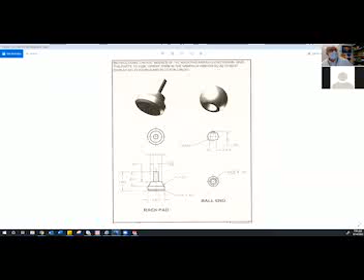All right, so in your table, we did that little table part, okay? This little plunger right here is what stamps down on top of the table. So it's gonna come down and punch through, and this is the part we're gonna make first. And then we're gonna make one of these.

Goes on the end of your handle, so it kind of holds on. Typically, this would be a threaded assembly. We're gonna do it as a welded assembly instead. But we're gonna spend some time on this. I'm gonna show you two ways to make this rack pad.

Okay, so if you're at home working on this, you want to split your screen. I was gonna print, like I said, I really was gonna print this off, and I can't print a thing today. So let's take a minute and look at these numbers and get an idea of what we want to do. Now, this is all circular as we're thinking it through.

It's got a chamfer on the bottom. It's got a fillet going around this space right here. We'll round this to it. And then it's got the stem. And the stem is going to stick into what is called the rack. And the rack is similar to what's on your steering column. It's a rack and pinion system.

So what we're looking at then is, as we build this, how would this be made physically? What ways do you think you can make this? If I was to say, go build this, what would you do? From what you guys have done in your lives so far.

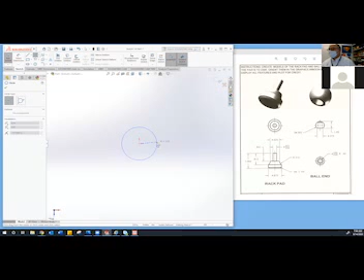Did you get rebooted yet? I'm working on it. Okay, good to know.

And this is our larger circle. So we look at our drawing, and where is our diameter for this largest circle? What would that be? I can't read numbers that far away. I'm okay, guessing 0.875. 0.875 is correct.

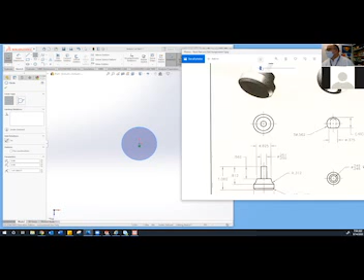Oh, I guessed it, you guessed it well. Okay, so we're going to do a smart dimension then. This will be weird, and make it 0.875.

Now at that point, we're ready to do our first extrusion. I've got to move this over a little bit.

And it's going to extrude up how far? How high up does that 0.875 go? Is that the value? So what you got to do is we're going up to this level right here, do you see that? So that level right there. It's supposed to have a little flange.

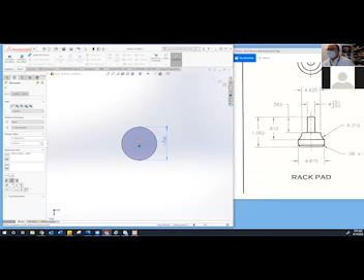1.062 minus 0.812, yeah, subtraction. So what I'm going to do is just go into the sketch here, go into features, and then go right into my extrude boss base. I know my total height is 1.062, I'm going to subtract from that 0.812. But I'm not going to do that math myself, I'm just going to type it in: 1.062, then put the minus sign, 0.812. There's no point in me doing more work than I have to if the computer will do it.

Then I hit enter, and it comes out - oh, it's a quarter of an inch. How nice, pretty simple math, right? But let SolidWorks do the math for you.

Yes sir. Oh, never mind, it says restarting because my thing crashed. Yeah, we're gonna have a little bit of that today, I think.

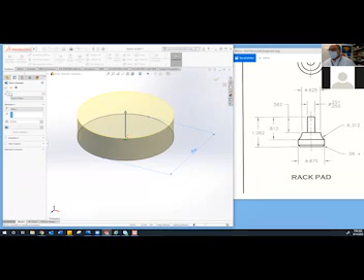Unfortunately, okay, so that gives my height. Just go ahead and check that off once you get it. So we're gonna take that value, 0.875, and extrude at 0.25.

How are we doing, buddy? We're getting close. Do you reboot the whole computer? Well, like I said, we're gonna do this twice.

This is probably not the easiest way of doing this, but it does allow me to show you a couple of things you can do. Questions - because now you can actually ask questions, and I can read faces a little bit, at least eyes. Yes sir, what's up man?

Okay, so what you're going to do is you type in the value 1.062, minus, and then you put in the 0.812, and then enter. Bingo, just like that. Isn't that sweet? Then check it off.

Look at this, I'm able to see your screens without going through a whole nightmare thing.

Okay, where are we at? We got this all extruded. Okay, so features, extrude boss base. And right here, the distance is where we type in those values. So type in 1.062 minus 0.812.

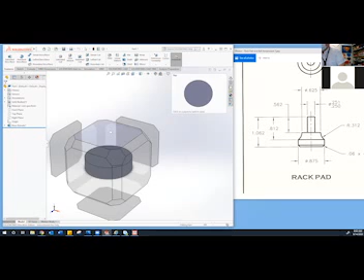Okay, this is the top view. We're going to make another circle on the top view. Typically I'd go into 3D and draw this, but we'll be okay right here, I think. Now, what's the next size circle that's on this?

You see how that comes? Yep, the 5/8. See how that comes down? And there's our next circle.

Okay, we good? All right, let's do a circle then. New sketch - this will be the first time we've done multiple sketches on a part. So do a new sketch and then activate your sketch.

Give the yellow box - it says take a minute and think about it. So if someone gives you a yellow snow cone, don't you always pause and think before you eat it? It just tastes good either way. One's salty and one's sweet. We're not gonna go down that road.

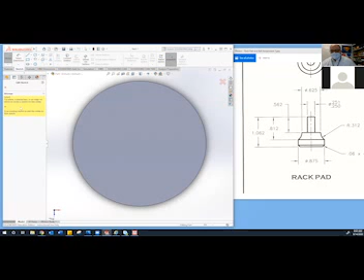All right, so I'm gonna pick on the surface of my top plane, so I bring it out. Notice my cursor's changed a little bit - it's got two blue squares. It's asking me to pick a surface or a plane to draw on. So once I click on it, I'll get a new origin point. Brand new origin point.

Now we're gonna do a new circle, add that origin point, drag it out, and now we're gonna do a smart dimension to size it. So kind of getting this routine - sketch, draw.

Now in the announcements, I'll go back over those before we leave today. In the Mechanical 1 class, you're gonna get the sketching you're doing now, that grade will go there, and the 3D model will go into the second class. That way I can move these two classes along at the same time and get everything covered. It just works easier that way.

The nature it is, so the smart dimension is really important here. Select the edge of your circle and make it 0.625. Pretty good looking circle.

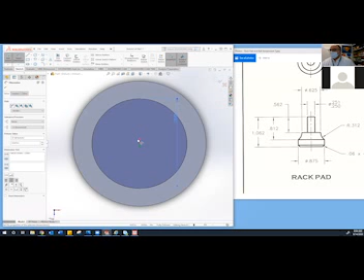Okay, now we've got to figure out the height of this one. We're going to do the exact same thing we did - I'm just going to tilt it so I can see what's going on. Again, push the roll button down and then push it away from me a little bit. What's the dimension on it?

0.625. It comes from this value right here. Yep, right there.

Try something here - all my tools are not working.

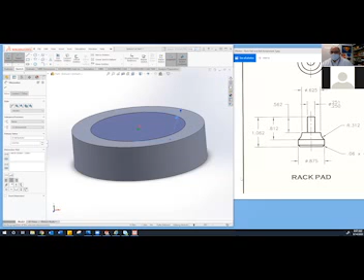Let's go ahead and do our next extrusion within the same process. The total height from the base to the top is 0.812, and from the top down to where we're going is 0.562. So when we do our extrude boss base again, we put in the mathematical equation because it's easier: 0.812 minus 0.562, enter. Oh my gosh, it's another quarter of an inch. You think someone planned this out?

Okay, now we've got our little wedding cake going on here. We now can do our final little spindle, let's call it a stem, that goes up from the middle. I'm going to leave it in an isometric view here—isometric just means I can see multiple surfaces at the same time, rather than going to the top view and seeing just 2 big circles.

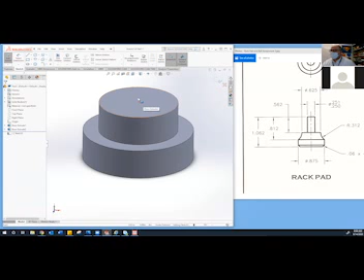Then do another sketch. Activate the sketch and select the surface I want to draw on, right here. There's my little origin right at the top of the cake now. We'll then do another circle. So we draw a little circle out.

The diameter on this circle is a limit dimension—it cannot be smaller than 1/4 inch, but not larger than 0.251. That means this stem goes into something else. When we make a hole in the bottom of our rack that this goes into, that would make it the largest size the hole can be. So what goes in the hole needs to be as small as it can be, so we're making it 1/4 inch. Whatever goes into something is made the smallest possible, and what it's going into is the largest possible, so that when things expand and contract with temperature, they don't bind up and get stuck.

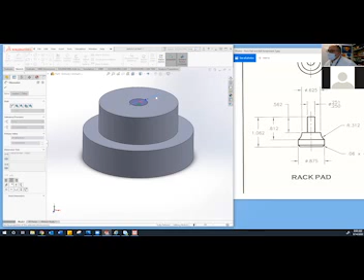So we're going to smart dimension this, make it 1/4 inch, and then you guys should be able to figure out what the extrusion is. How high up does it go? Our value here is 0.562. And there's a little stem.

Great wedding cake, right? Okay, we have 2 things to do to this. One is that the bottom of the rack pad has this chamfer—a nice, pretty little chamfer. And on the top is this concave, fun little 0.312 radius. We're going to do the chamfer first.

So we move along here to our fillet tool, hit the down arrow, and change it to chamfer. Our chamfer is like almost all the chamfers on the arbor press—it's 1/16 of an inch with a 45-degree angle. Down here where the distance is, change that to 1/16 of an inch, 0.0625, or you can put in 1/16. SOLIDWORKS is pretty ambidextrous—it'll take it any way you want to give it.

Once you have that value placed, all you have to do is bring your cursor over and select the bottom edge of your wedding cake. Boom. If you have your full preview on, you can see what that's going to look like before you do it. And then we just check that off.

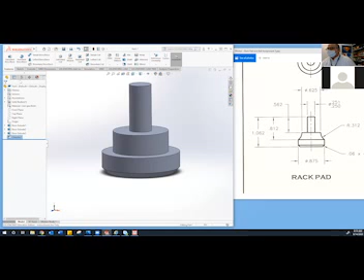It's still in the features ribbon. We're going to do a fillet, and I'm going to have full preview on. I want the edge that's between the 2 tiers—this edge right between the top cake and the bottom cake. Click on that. Now, if your radius is too large, you will not get a preview, so you won't see anything until you adjust the size. We want that fillet to be 0.312.

Once you get the right size, it'll give you the preview of that scalloped edge. If ever you have the full preview on and you can't see a preview, that means the size is too large for what you're trying to do. Right now the distance here is a quarter inch up, but I only have less than that going this way. That's why your size is kind of important.

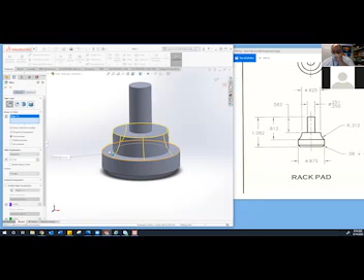Hit your check mark, and that is the rack pad. Easy peasy, lemon squeezy. Go ahead and save this. The next one you do is going to be a little more complicated. I said this is your hard one, but yeah, this is one.

So what is this called? A rack pad. Yep, say this is a rack pad.

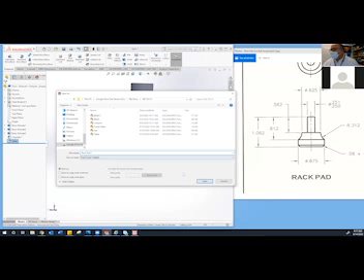Now you can choose to keep this one and use it for your final assembly, but I want to use this because some of your assignments this week are going to ask about another command that we need to learn about, because we haven't done it yet and we need to.

If I look at a drawing like what I have here on the rack pad, there's a center line that goes right through the middle. That's a dash - well, it's a long, short kind of dash line. A center line in mechanical engineering means two things: one, it means it's round, and two, it means it's symmetrical.

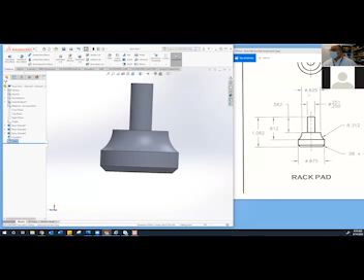So you have to look at your other views to determine the roundness of something. If I look up above, I've got two center lines that create the center point of the top view. That helps me understand this is a round object. But because it has a center line that's symmetrical, I can do a few things with it, just like our base being symmetrical - we just mirrored it over.

If I want something round, I can't do a mirror, but I can do a revolve, so I basically can spin it. That's what we're going to do with this next. We're going to spin this around, so at least I understand what revolve does.

This is a good one to start with, and as we keep going, we should probably, hopefully get maybe four drawings done today, which means we'll go back to the throwing star.

And the girls are going, I don't want to do a throwing star, that's stupid. Throwing stars can become Christmas ornaments really quick by punching a few holes in them and making them into Christmas stars and ornaments, so we're going to actually do that. I've done, in the past in this class, things like cookie cutters, and we 3D print our own cookie cutter, which is kind of cool. We might be able to make some cookies - I have to talk to the cooking people.

So we're going to do the exact same part again, but this time we're going to do it with revolve, so you know what it's going to look like. Did everybody get this one put together? Yes sir, absolutely perfect. Okay, so go up and start a new part.

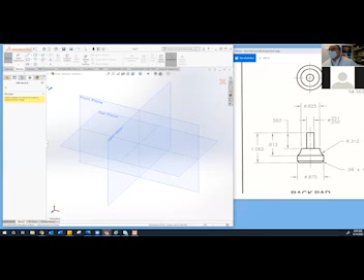Okay, just hit the X and pick out, or if you're in the sketch all the way like you did top, using the top plane, just come here and exit the sketch, then click on it again, then rotate it and get to where you get the front plane. It'll change your sketch number, but that's not a big deal - it'll just change which number sketch you are.

So because we're going to do this, I want you to start - we're going to start with a center line. Go up to the line tool, hit the little arrow, and we want to change it to center line. Did everybody find that?

Click on center line, then take it from the origin and just draw it up. The length of that line doesn't matter - that center line doesn't matter. Somebody draw a center line. I am going to walk in the back of the room and see how you're doing, because I think I need to do that.

Okay, my friend, you probably have a hard time hearing this mask, so we need to make sure you stay visible. There's some things we can do at the center line now that make life really easy.

Remember when we make the tiered cakes, it's basically a stair step. So that's what we're going to create.

Which side should I start on, left or right? Which one do you want me to be? Right to left, okay. So I'll be working on the right side.

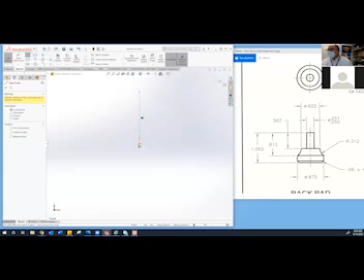How do you get that dotted blue line? Float over the origin and then pull it out. Then just draw a line up, line over, line up, line over, and a line up, just like that. Boom, boom, boom.

Easy peasy. Okay, so we got this little stair step thing going on. Let's get a thumbs up if you got it. Cool, I love thumbs, the only thing that separates us from monkeys.

No, because they have thumbs. Actually, they could probably do this program. So thumbs down, right? All right.

Now we know some dimensions on this already, but we have a center line. So I know some of you, like in the back corner, moved ahead a little bit. I want to show you a couple things with the center line that are kind of sweet.

I know that this line and its counterpart on the other side would be a total of 0.875. That's this guy right here. Divide that by 2? Nope, this is where magic happens.

I like magic, so hit Smart Dimension. If you click on your center line and then that lowest vertical line and pop it over, watch the screen a minute.

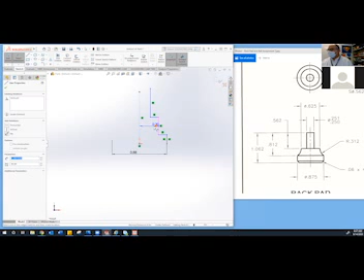Okay, let's do the next tier up, same way, we're still in the Smart Dimension. Notice I'm doing it all in one sketch instead of 4 or 3. So center line, next vertical line, pop it over, make that one 0.625. It'll come up 0.63, that's fine.

And now our third one: center line, the third vertical line, pop it over, 0.25. Okay, just boom, boom, boom, just that quick.

Now I'm going to start down here at the bottom, and then come around and help everybody. What's the height of this line? What's this height? 0.25, because you kept it simple. What's the height of this line? 0.25, oh, it's already there.

I'm so good. Okay, and then the other one, we have to go a little different. Let me get you out at this point, and the last one's a little different.

Oh no, you over-constrained it. You tied it up and it can't move.

Okay, so get off that one. Make sure you get just the line. Okay, so you're going to just try to do horizontal at the same time. 0.25 to work with.

Okay, and if you notice, I'm already kind of sloping downhill here. My endpoint here doesn't match my origin, and that's fine. I'm not worried about that right now. I want to get my lines all the right height. Okay, and my total height is 1.062. There's actually 5 in there. We're not worried about it.

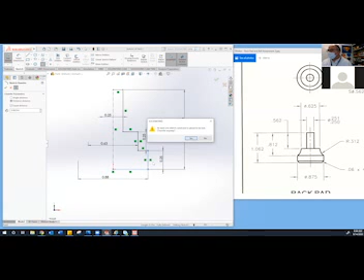Select the 2 lines at the bottom, and it's still going to say... yeah, there's some loose constraint. It's going to do this. It's going to mark them out there because I'm taking away the endpoint that was used for dimension. And that's this point right here is now an asterisk, because when I chop that corner off, I remove the data that was used to hold it together. It's still there, I'm okay, but it's to say you kind of unconstrained yourself a little bit. It's just a warning, it still works.

But if that bothers you, I can Control Z and put it back. It's not a big deal. But when I chop this corner off, I'm losing this dimension and this dimension's anchor point. And it's to give you an error, a warning. It's not really an error, it's just a warning. Okay, so if you want to leave that off, it'll make it a little easier for you, a little less errors. But just understand what the warnings are saying so you don't panic on them.

A lot of times you say, hey, you're using up your endpoint, it's going to throw off your dimensions. Are you okay doing that? Yeah, sure, fine, I'm okay.

Here's the new command, you ready? So whether you chamfered it or not, here's the next one. Go to Features, Revolved Boss/Base.

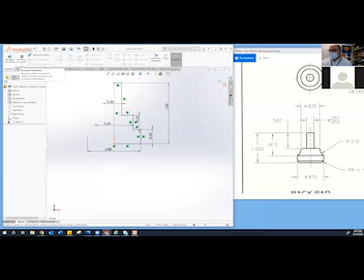It should show you this preview right away if everything's well. This is a really important aspect of being able to do your lightsabers, being able to do a good revolve and understand what's going on with it.

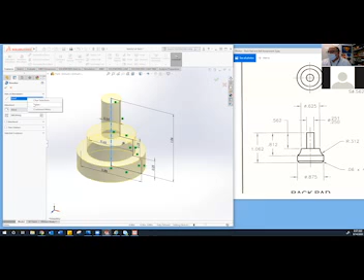Now if for some reason you decide to pick a different line, you're going to get a different result. So I'm going to clear that out again, pick a different one. It won't do that. Well, I want to do this line. It did fine here, but not here. What's going on?

Actually, there's too many negatives. So if I'm revolving about this line, everything above the line is a positive, everything below the line is a negative, and they cancel each other out. So you get a null set. Your equations cancel each other out and you can't make it. So too much data, that's just bad data, okay.

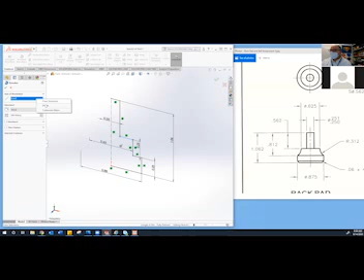But I can pick the line up here. Again, you can clear or delete, either one works. Pick a different line, it spins a different way. But we want to go and spin it around the center line. Then when you check it off, you're right back where we were.

We can now go back into the fillet command, 0.312. This time it will work just fine and dandy. Where it didn't work in 2D, it will work in 3D. So check that part off.

Change the fillet to chamfer. Make sure it's set to a 1/16 of an inch, 45 degrees, bottom edge. And that's two ways of doing the same part. Either way is fine, you'll find you like one over another, and that's fine.

Wait, what's the one for the dimension? All 0.312. Yes.

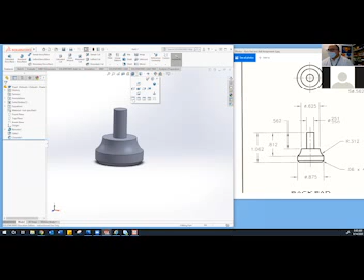Then we get down here, there's 4 more. This first one is for a single view screen, that's what you're in right now, you see it in one spot. Click on the second one.

Okay, now you can see it in 2 ways. Each one's independent of the other, but you move it, they're synced. So I got a front view and a top view. For this drawing, this is actually what I would want, is this submission.

But let's keep going. Find your view orientation cube again, split it into 4, go all the way over 4, and now you can get 4 independent views. So you can have a top, a front, and a right side. Okay, so this will be your screenshot.

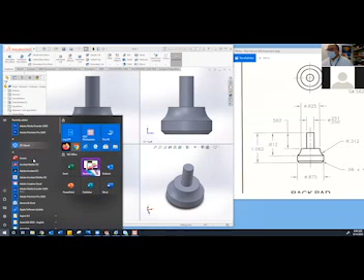Now some of you have figured out the follow the instructions for screenshot. There's an easier way. If you go down to your Windows icon in the lower left-hand corner, this little guy right here, and you just type the word snip, it'll let you open up an app called the Snipping Tool. Just start typing the word snip, okay, just like this.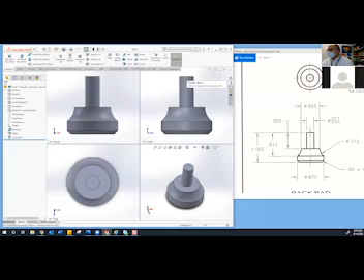Then when you get your view where you can see everything, all you have to do is hit New, and you can copy the entire page. You just hold your mouse button down and drag it. That'll be the view you have.

Okay, now you're not done yet, because you can share these, and that'd be no bueno. Actually you'll probably do it anyway, so I don't care. There's a pen at the top, type your name on it, or write your name.

Just so I know it's you, you can write your name with your mouse, like using a pen tool. You can do different colors, I don't care what color you use.

Just put your name on there so it's not on your drawing, that way I know whose it is. Then go to File, Save As. It'll save as a PNG file, but just save this as RackPad.

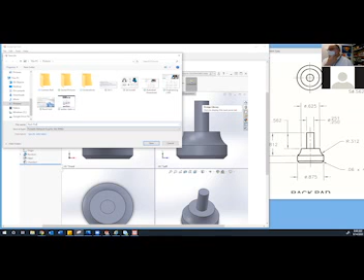You can submit that on Wednesday. On Wednesday there'll be a place for you to upload this into Canvas for your grade. But I need at least the front view and the top view, those are what I really need on there. That's what you would get if you were just in the two views.

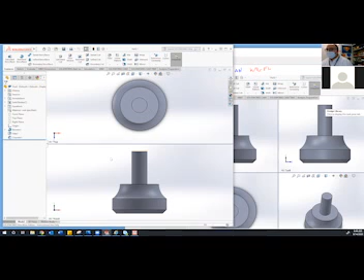This is what I need because it gives me the 2-dimensional stuff for the one class. Just save it and give it a name, save it in your directory. After you save your files, you have it.

Put it in your 3D folder so you have it with it, and then name it RackPad, P-A-D. That's gonna be the easiest way for you to submit things and keep things working. Does that make sense?

Don't submit anything till Wednesday, you can start working on those assignments. So let's talk about those before you do the next one.

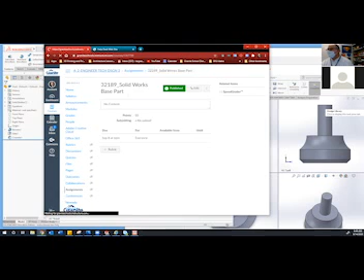So we've got 2 courses here, and they're different in each. So you want to go to the announcements. This morning it says week 4. So here is what's going to be due in this course.

This is the second course. You've got some geometric identification - oh, I spelled shapes wrong, geometric shapes. Got to fix that, I'll edit that in a minute.

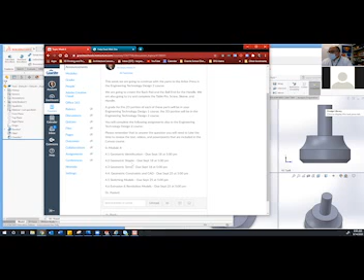Geometric terms, constraints, sketch models, and revolution. Let's go in, I want you to look at those right now, take a minute, then we'll do a break and come back. Look at each of these to resolve your concerns over how much work this is, okay? So let's do that first.

You go in here, go down to module 4. I should have gone the other way, I went the long way. Bear with me.

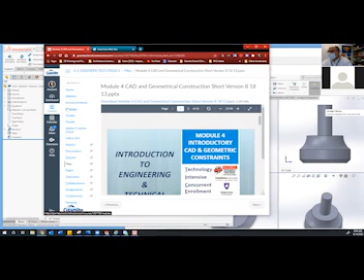That's not what I want you to do. This is your reading, 1 through 6 - yeah, pretty much 1 through 4.6. It's not all of them, just the 1 through 4.6. So they're not terribly hard.

So let's take a look at geometric identification. If I hit the preview there, get an idea what's going on. What is that shape? What's that shape? Can you identify the name of the shape?

Okay, you put a lot of time into this. I did, it was so much fun. I'm going to show you how to color your parts here in a little bit too. What? Oh my gosh, yeah. So that's that one, okay.

If that takes you more than 2 minutes, slap your mother, because she didn't teach you shapes. Don't tell her I said to do that, that would be bad.

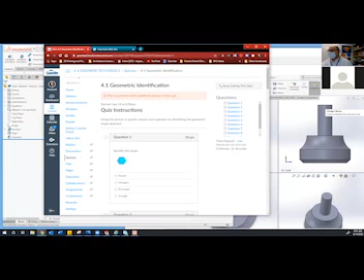Okay, let's take a look at the next one. You can probably do that one while you're waiting to do something. This one's not much more difficult. Okay, look, oh my gosh, there's the 5 shapes.

Name them again, name the parts of the circle. Do you guys know the parts of the circle? So if I asked you what F was, what would you call F? What would B be? What's that area called?

Quadrant, yep, there's 4 of them. So quad is your clue, there's 4 quadrants. That's quadrant 1. What is C?

Radius. What makes it? What's D then? You come down here, what do you think that would be? Sector. So if you're a Star Trek fan, they fly through the Delta Quadrant. If you're on Voyager, Alpha Quadrant's where Earth is. What's that?

A is the tangent point, F is a chord. G would be a segment. This area D is your sector. Sector is part of the quadrant.

When we navigate our solar system, it's divided into quadrants. Because the sun is the center, we divide the solar system into 4 quadrants. Then Star Trek takes that and divides the universe, with Earth still being the center.

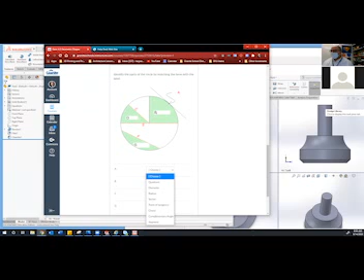Oh, crazy. All right, so that one's not terrible, right? You guys can handle that. Easy breezy.

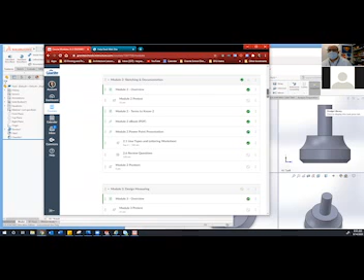So it should take you 5 minutes, right? What do you call D again? I don't know, segment? Was it segment? I can't go back and look. Darn it, all. Let's see, do we do this one? That one we just did, let's take it up here.

Okay, this one is a little more terminology. There's 7 of them. A series of points equal distance from the center point.

What would that be? Series of points with an equal distance from the center. If you got a bunch of points all from the same center point, what would that make? Circle. Okay, a part of a line that is bound by 2 distinct endpoints.

Line segment, yep. I'll change that, it's one try today, I'll change it tonight. A line that intersects 2 planes.

The intersection of 2 planes, what would that be? And then this one, the surface defined by 3 or more points. Just one, well, it could be a plane.

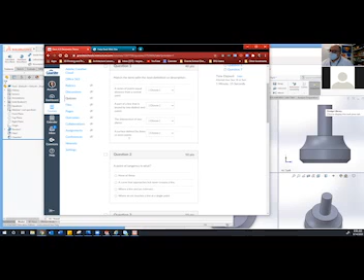Okay, so let's find out how you're gonna answer these buggers, right? If you get onto those and you're going, well, how do I answer these? Because I didn't really tell you the answers in class. That's because your book is in here too.

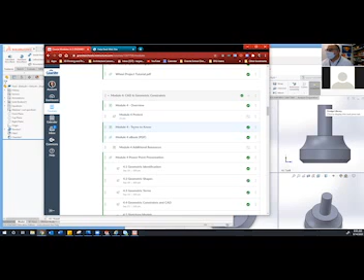Yeah, there's a book, like right here, terms to know. And there's a book, an ebook. So the terms to know, because we didn't really spend a lot of time on this before I got booted out, so sad, the terms to know is really just flashcards.

When you pull this up, you click on it down here. Oh, come on, get off this. Let's play, my cursor is not cooperating.

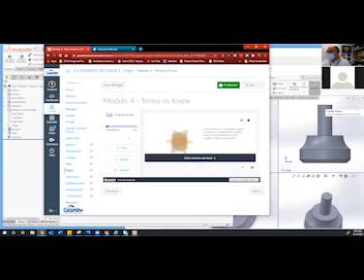That was working this morning. That's supposed to flip the card so you can see it.

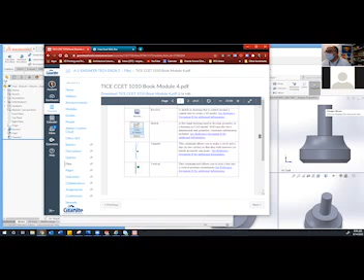There's also this text here, which is one I wrote. We're going to be doing this part next. But this has some of those terms in there as well, so you just need to go through the terms. You don't have to read the whole thing, but it talks about these different terms so you can work through them. The same terms that are in that Quizlet. Just go through the terms and the answers are there for you.

Again, I'm trying not to make this like really a hard course. It's supposed to be fun, but we do have to get it so you can get a job. That's the important part, I don't know why.

Then there's this, these are constraints in CAD. We'll preview that one as well. There are 6 questions, okay, they're not as overly crazy as you might have thought.

Okay, so if you have 2 circles on a plane that do not share common points, those would be called what? If you have 2 circles that don't have the same center point, we talked about this in class last week when we did the table.

You don't want to go back and listen to that whole lecture. Not concentric, the key term is not shared common point. So what's the opposite of concentric would be eccentric. Concentric means they're on the same normal axis or the same starting point. Eccentric means they're not.

These are all set to 1 right now, I'll change that here shortly. 2 lines on a plane that are equal distance from all other points would be what? You got 2 lines on a plane and they are equal distance from each other - parallel. Okay, you guys should be able to kick that out.

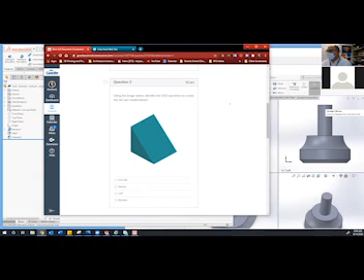And then, oh, what is that called? What would make that shape? This would be done with extrude. Yep, okay, so that's extrude. What would make that shape? Revolve. Yep, and then freehand sketches are drawn.

This is off your state test questions. When we draw freehand sketches, we want to keep them in proportion. So we don't draw a little teeny tiny nut over here and a giant screw over here and say they go together - that's not proportion, you want to keep them in proportion. A simple cylinder can be extruded or revolved.

Is that true? You just did that. Can you revolve or extrude a cylinder? Yep, absolutely. And the last one here is everything starts with a sketch, right? Yes, everything starts with a sketch. Okay, that's for this course.

Again, this should take you no more than an hour this week, tops, right? That's kind of my plan, is keep it simple but effective.

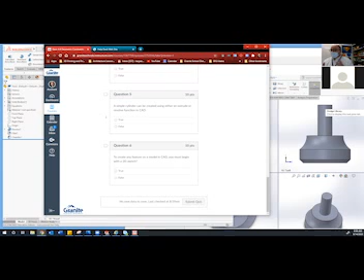That seems harder to say. Step over the first class then, the other one, the boring one.

Let's take a look at what you're doing this week. Oh, nothing else, that's it. Oh wow, so much work for you.

Okay, overwhelmed? All right, let's take a break. Let's come back at 6 after the hour. Okay.

9:06, dude man. I gotta watch you, is that how you win your races? You cut back the time?

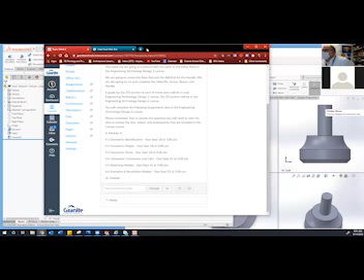No, yo, I could not access week 4 or something. Really? Yeah, that access denied. Okay, let me pull that over here. Let's see if we can figure out what's going on there. It's always one more thing.

Let's go take a look what's going on in week 4. Module 4? Yeah, or they're not, is that what it is, the module? Yeah, the module.

Well, it's published, are you going through the buttons? Yeah, let's go look at your stuff. What do you usually see what's going? This is what was telling me last week. I go back here, there, I click on week 4.

All right. I think it's because I changed the name on it. So let me just fix that real quick.

Hey, great one. So man, what do I do for you today? Teach me what is it, CAD?

I'm gonna teach you how to draw a bike in CAD. You design bikes in this program? Absolutely, yeah, some pretty cool ones. Yep, that actually is great.

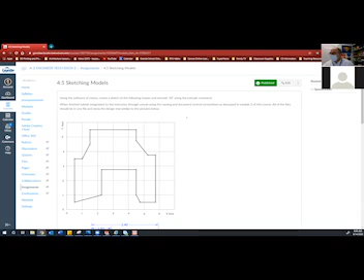What we have here is 3 distinct different ways of drawing. Now all of these can be done in either AutoCAD or SolidWorks, but you need to reproduce these, and I'm going to give you time on Wednesday. Man, you guys, I have seen this class way too many times the last 2 weeks.

So on Wednesday, what we'll start the day off with is these. So if I want to know what that point was to start, what would you call that? Origin, that'd be the origin, yeah. Even though it's probably 0.5 and 0.5 is where that's going to start. What's the length of this line then? 3. And how'd you figure that? 4 minus 1. Yep, that would do it.

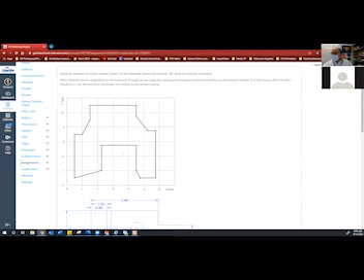So we just took that part. So you didn't produce this part to get it to the right size. All it's going to ask you on these, well, let's go look what's asking.

I might change my mind on this one. I might have you just do this one right here. Okay, so if you guys will hold off, this one's more likely what you'll see on your state test. Some of you ran across this in the practice for it. There's some drawings, you have to be able to tell what's the size of this circle, what's this point's distance from here. Let's focus on this one on Wednesday, and we won't worry about the other two because they all do the same thing. Okay, so we're gonna do this one in class on Wednesday.

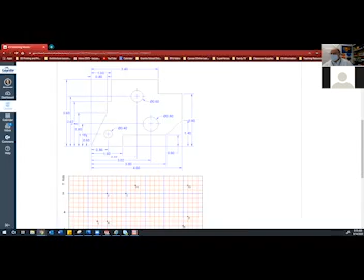Okay, fair enough? So now there's one assignment, take them off your palette. And then I found out that the link is broken on the main page, so we've got to figure out what happened there, so I'll get that fixed. All of them are now set to unlimited tries. They were all set to 2 tries instead of 1, but that's okay.

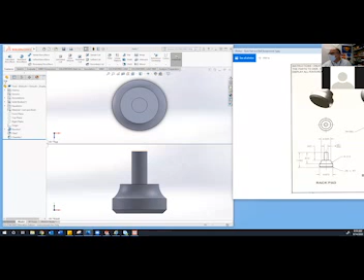All right, so we're ready to do our next part of this drawing, and let me get that up here so you can see it. And that's this ball end right here. This one's a little bit more of a complicated drawing. It's not overly complex, there's just some thinking that has to happen, and that in itself can be problematic.

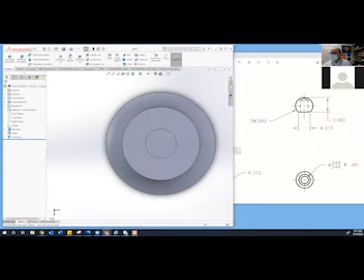If I want to go ahead and put your views back to single, view orientation, single panel, and go ahead and start a new file. New file, which is a new part file. Okay, this will be our ball end. This is also going to be done with the revolve and a little hole wizard work.

Okay, because we want to get this little drill relief here. So when you look at a drill, there's 2 types of drills. There's a drill that comes to a point, and there's another one that's flat, flattened off. That's a machinist drill. When we drill a hole into something, it's going to have this little end piece that is just there.

We allow that on certain parts because it keeps the part from vacuum sealing up. So if I have a piece in there and it's the friction involved, I can make the air inside this cap allow it to be released. If you don't have that, things get tightened up there and then they vacuum seal and you can't get them out. Okay, so let's take a look at what's going on here. It looks like almost a semicircle, but we're going to cut it off here at the end. This note right here, S diameter, what do you think that refers to?

What would you call it? Spherical. Yep, you see an S, you can hit spherical diameter or spherical radius. So if there's an S in front of it, that means it's a sphere.

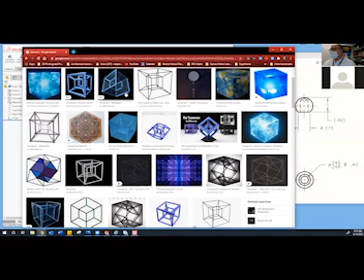In fact, I'm thinking of what I want to do with that. Like, can't you animate it so it's like folding inside out of itself? Oh, you want to do that? Yes, the guy upstairs can do that. That's a little more animation than what I do. We can try. It'll be a lot, it'll be a lot. We'll try.

Okay, let's start here with a new sketch. Everybody with me now? Okay, new sketch. Start the sketch, choose your plane. It doesn't matter on this one, choose any plane you want. Top, front, left, right, bottom. And this one, I don't remember which one.

What you don't want is to sit on your project, animate a tesseract, and have the machine start to smoke, which is, I've been there once before. It's not a good thing. When your computer gets too hot processing - and that was just because I was being stupid, I opened up 999 files because I wanted to see how many I could open, and it cost me a hard drive. Yeah, it did. The motherboard heated up and it melted and took out the hard drive with it. There's a limit to what home computers can do, okay, and I found it. I could have done it easily at work on the network. If you're on the network you have a lot more memory space, but I was pushing the hard drive and the motherboard really hard, and I shouldn't have done it. I was just being stupid.

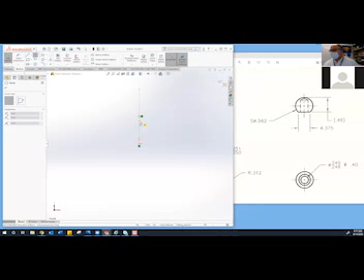Okay, we're gonna start this out, we're gonna do a circle on the center line, okay? Not the center point, remember that center point's that yellow square, we don't want to lock things down to that. So we're just gonna do a circle. I'm gonna place it on the center line, but not the midpoint. Okay, just draw a circle there. Now it won't be anywhere near the origin, and that's fine. Okay, but the origin is what kind of keeps us so we know where we're at, and so we don't lose ourselves. And we're going to look at what's being asked here.

Okay. I know the diameter of this is 0.562, that's going to be my diameter for that sphere. So let's go ahead and give that a smart dimension on this circle.

Okay, now we don't have to worry about the spherical thing. That's what happens when we revolve it, we'll get that with the revolve. Then we got to look at what this number right here is. This 0.49 is in parentheses.

Whenever you see a dimension in parentheses, it's called a reference dimension. They're meant to be field verified, which means there's a lot of allowance. It could be 0.5, it could be 0.48. It's just what happens is what happens. And a lot of that will be a result of the grinding that takes place to flatten this bottom off.

So when these are built, they'll be done in a mold, and then they'll go to a grinder, and they'll flatten this bottom part off before they drill. It's probably the least efficient way of making these, but it's what we do. So this is an approximate dimension, okay? But when they use it, it makes our life a little bit easier, hopefully. And I'll show you what that means, because this one's absolute. This 0.375 is an absolute value, needs to be that. This is an approximate, okay?

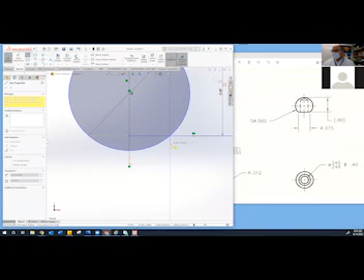And what we're wanting to do is measure this distance, okay? You go down or up? Either way, I just want a dimension between the two center lines now. And when I do that, I get a value of 0.19. What is half of 0.375?

0.375 divided by 2 gives you 0.1875. Yep, that'll work, I'm in close enough position. Okay, so I'm just verifying that I'm going to have the right surface area. That's all we need.

You ever put Kool-Aid in your shower head? What? Oh, I put ramen noodle in mine. Yeah, that just smells bad. If you do like Kool-Aid or Jello, it'll turn your victim colors. College is amazing. College is fun.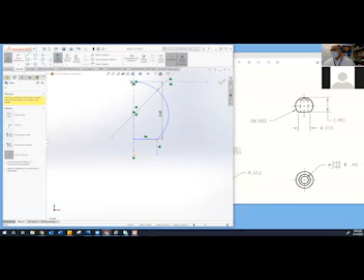Okay, so even though it's going to be a circle again, or sphere, I need to trim it down so it just has the semicircle and a flat line.

So I'm going to do Revolve Boss Base. It's going to ask me for a couple things because there's so much information on my drawing now, even though it doesn't look like much. I first have to tell it the axis is this center line.

As soon as you tell it what the axis is, it'll make your sphere. If not, then pick inside the space here. But you could do, okay.

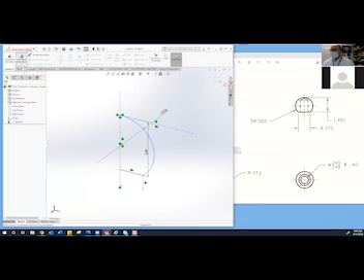Let me do it another way - Revolve. If it doesn't work, you can come down to select contours, and I can pick in this surface here, then tell it what axis to go around.

Making progress on our drawing number 2 today.

Okay, so once you check it off, you now have your sphere with a blunt end. We're then now going to put the hole in the bottom.

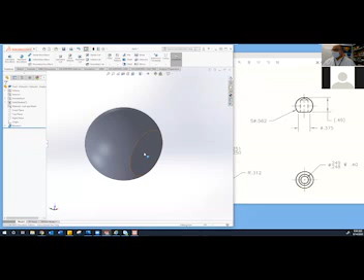Okay, so let's get you all here. What you need to do is go in your view orientation cube and get it where you can see the bottom. That means you see a little circle, big circle. Okay, so get both those up there.

Okay, now what we're going to do is go into our feature tab where we're at right now. We should all be in the feature tab. And turn on the hole wizard.

Press it or the down arrow. Ooh, okay, what? I didn't understand that question.

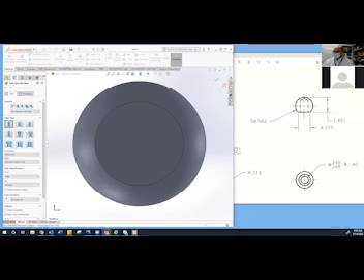Okay, now if you don't have where you can see this flat surface, the holes can be put on a rounded surface - that's unlike anything else we do. Typically you can only create things on flat surfaces or planes. The hole wizard is different, it'll put a hole anywhere you click, so you really want to pay attention to where you're at. It's kind of a nicety.

And we're going to go ahead and set these up. What we have is a hole that is about almost 0.25 and only goes in 0.4. That's all the information we have, okay, nothing more than that. We're not worried about threads, we're not worried about anything else.

So where they come across here on our type, we're going to go right here to straight tap - actually, it's to go to hole. We're going to do the hole instead. And then the top row, just a hole, we're just making a hole. So click on that one right there, top row, first one on the right. Yep, just the hole, just make a hole.

Now, yes, you can do these with just a circle and extrude, but if you do that, you got a flat bottom, and then you're likely to not ever get this thing off of the handle when you put it on there - it's going to fuse to it. And we don't want that.

Okay, so let's look at our sizes. We've got all drill sizes at our beck and call. We need to make sure an ANSI inch. Again, ANSI stands for what? American book.

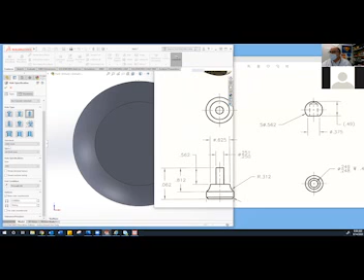What if we do metric? Oh, American National Standards Institute. If you're in metrics, your ball is about the size of a Volkswagen. Yeah, so we'll deal with that later. I don't want to deal with that right now.

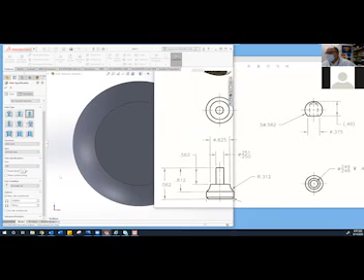Remember to go make sure you're in IPS at the bottom right. Make sure you're checking that. You need to find out which computers have their templates screwed up and get this fixed.

Okay, let's look at the sizes and scroll down. Don't get past the numbers, those are all metric sizes. We want to get close to 1/4 inch because we're looking at 0.249. So we're going to go find 1/4 inch, that's what I want you to find. It's going to be a little bit larger, but that's okay. It's okay to be a little bit larger. So 1/4, yeah, 1 divided by 4.

Okay, now it's not going to go through all, so change the through all to blind. And you're going to change the depth to 0.4. So blind, 0.4. Then take the check mark off of near side countersink.

Wait, but how did you find that thing under it? Change the depth to blind. If it's through all, you won't have that. If you change it to blind, then you get a distance, like... no, 0.4. Then we do not want the countersink, so turn that off. So all we have is a 1/4 inch size hole going in 0.4 inches. That's all we want. Okay.

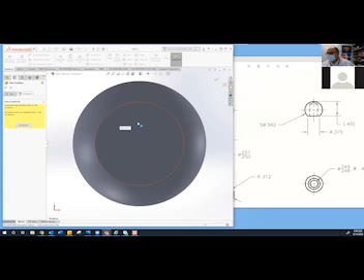Then we go over here to position. Click on the position tab. Come over and find your flat surface, click it once, and you should see the origin. Then you put your hole right on the origin. As soon as you have that done, you hit the green check mark, and you've got a hole in there.

Okay, now we need to look at something a little different. Is that a hand? Okay, don't go anywhere. This semester, it kills me.

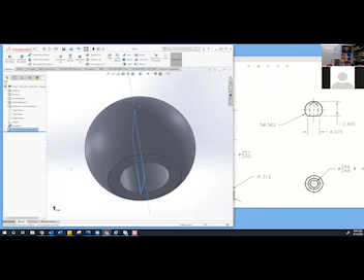We then work with silicone. I mentioned this before: the day we do silicone work, wear clothes that if they're destroyed, you won't cry. Because if you get silicone on your clothes, you're not getting it out. It's there forever, okay?

Okay, now if you'll go back up to the top where your views are, we've got a zoom to fit. That just makes it fit your screen. There's a zoom area, so I could say, just zoom up on that, and then go back to zoom to fit. There is a zoom previous, which moves you back. If you've zoomed in and can't remember where you're at, back up one.

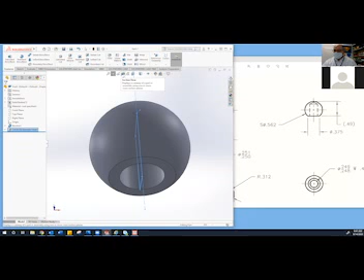Then there's this guy, this is your section view. Everybody click on section view. Now, when you do that, it's going to cut right down the middle of whatever plane you're working on. So if you're on the top plane, it's going to look like this. Or the back plane will be like this. In this case, I'm here.

Now there's an arrow and there's an orbital arrangement. You can tilt how it's cutting, so you can analyze it that way. You can also grab the arrow and uncut it, or back it over through it to see what's happening as you're taking dissections through your part, so you understand what's going on in there. If you keep going, it will simply disappear and leave a shadow.

So again, you can bring it back by just sliding that arrow. But this allows you to track what's going on the inside of your part, especially when you work on your lightsaber and you're trying to figure out where the wiring's going to go. How do you get the wiring in there? Where's the wiring going to be at? How are you going to keep it from getting pinched? And how do you get that all to work out right, okay?

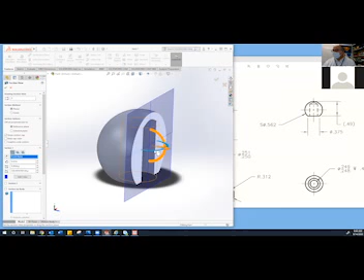So the section tool allows that. And again, you can set in absolute values, and you can just drag it to where you want it to be. You can rotate it, look at it from different angles. It's just a viewing tool. When you're done, you just hit the X and you're out. It's just an on-off, it doesn't affect the drawing at all. But you need to be aware of that as we're working.

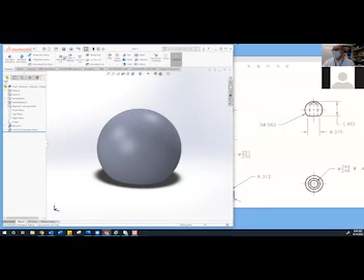Okay, this needs to be saved in your file as ball end. Please put the end on there. Had problems in the past. Ball end.